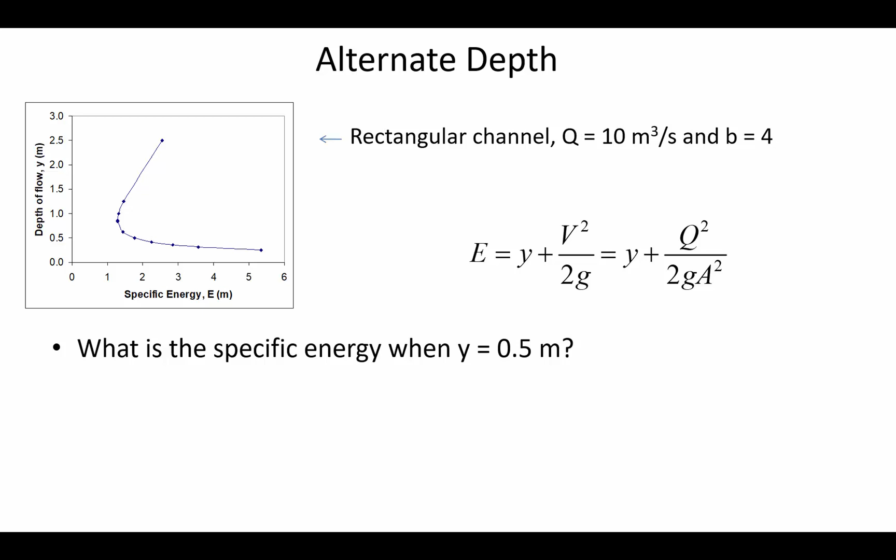But let's use the specific energy equation to find the alternate depth numerically, because graphically we can find the alternate depth too. So graphically, if you go sideways and intercept the figure, here's our specific energy, and then up the same amount of specific energy, and then back over again, it looks like it's maybe about 1.45 or so, approximately.

Let's find out exactly the alternate depth corresponding to 0.5. So 0.5 meters is one of the depths for that amount of specific energy. Which is the other? Now the way to do this is we're going to just neglect energy losses. We're going to assume there are two different depths, and that if there was a jump between them, there wouldn't be energy losses in the hydraulic jump. In future examples we will address how you could account for the turbulence that exists in a hydraulic jump and how much energy is being dissipated and so on. But let's just find out what is the alternate depth for a depth of 0.5.

So the way to do that is we have to find out what is the flow velocity if we have that depth of 0.5. Well, the depth is already known, so we know y. So find out what is the flow velocity, v, solve for E, and then there's a second depth. And we might as well just leave this Q as 10 cubic meters per second.

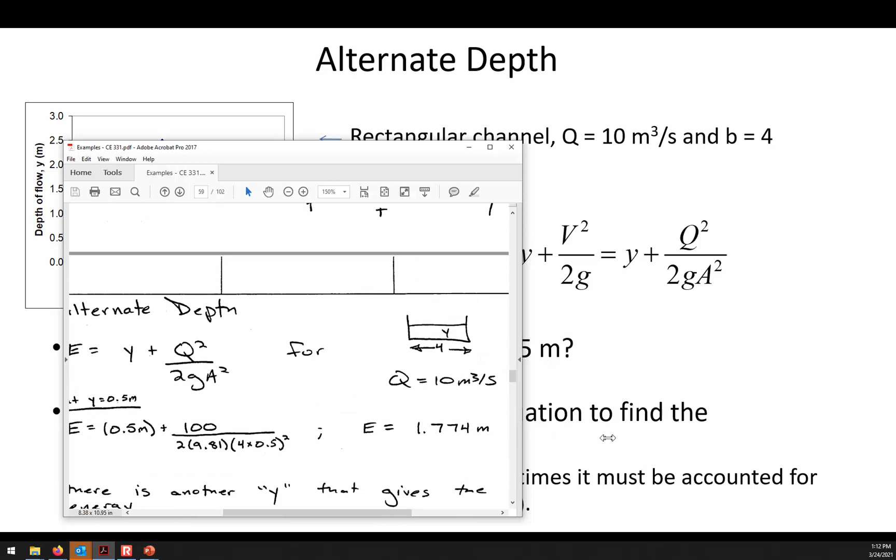Hopefully you got that the specific energy that's in the channel is 1.774 meters. Well, shoot, all right, I'll just do that. It resizes the window when I drag it over from my secondary screen.

Okay, at a depth of 0.5, then that means y is 0.5. The width of the channel is still 4, so the area is going to be b times y. The depth is also here in this first term, so the energy is 1.774.

So there's another depth out there that gives you the same amount of energy, and we can see it graphically here. So when you've got 1.77, here's the 0.5 that gives you the 1.77. So what is this other depth that gives you the same amount of specific energy?

Okay, so what we do is we say 1.774 is equal to y plus Q squared divided by 2gA squared. And Q squared is 100, because this is 10 cubic meters per second.

2g down in the denominator, and then a squared, so 4y, and then squaring that.

Now we already know that 0.5 will give you a solution, so we already know that root. That's not the root that we're interested in.

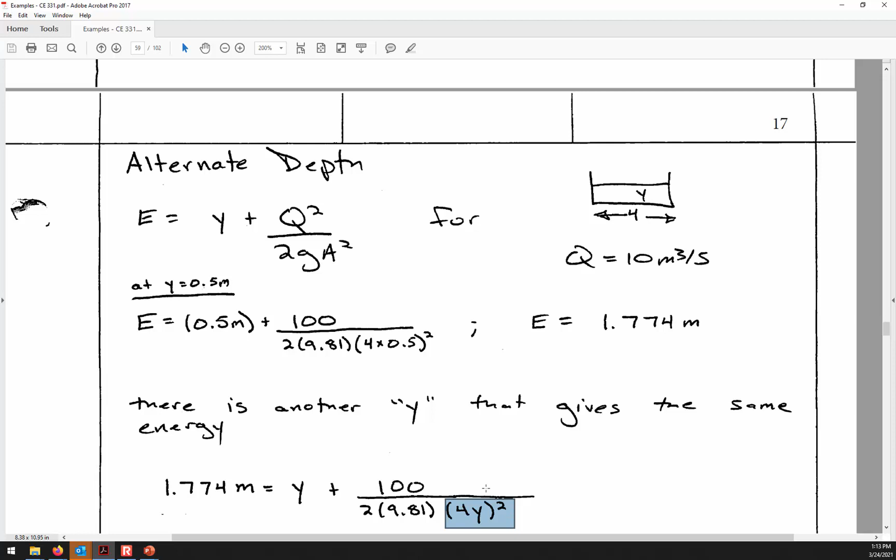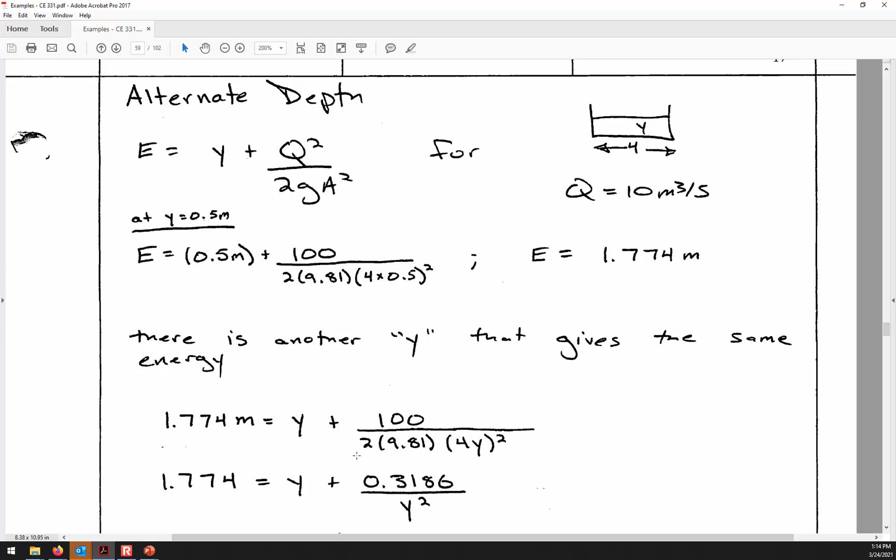What we end up with is if you multiply, just combining variables here in the denominator, 4 squared is 16 times 2g, and then 100 divided by that gives us 0.3186 in the numerator, and then multiply each term by y squared.

So you can see I'm just doing a little bit of algebra here. On the left side of the equation now, 1.774 y squared. This y has been multiplied by y squared, so now it's y cubed. And then the term furthest on the right, we multiplied that by y squared, so now it's out of the denominator.

So now this is a cubic equation, and I can rewrite that as y cubed, and then move the minus, subtract the y squared term to the other side, so minus 1.774 y squared plus 0.3186. So on your calculator, can you solve equations like this?

On your Casio, I know that I can here on the HP. We're looking for what are the three roots of this equation. We already know one of them is 0.5.

You can use solver. The thing about solver is that it's going to require an initial guess. And so if the initial guess you give it is like 0.4, then it would go out and find whichever solution is closest to that initial guess. So if you told it 0.4 is the initial guess, it's just going to go and find the root that you already know. So solver can work, but you're going to have to make sure that the initial guess you give it is larger.

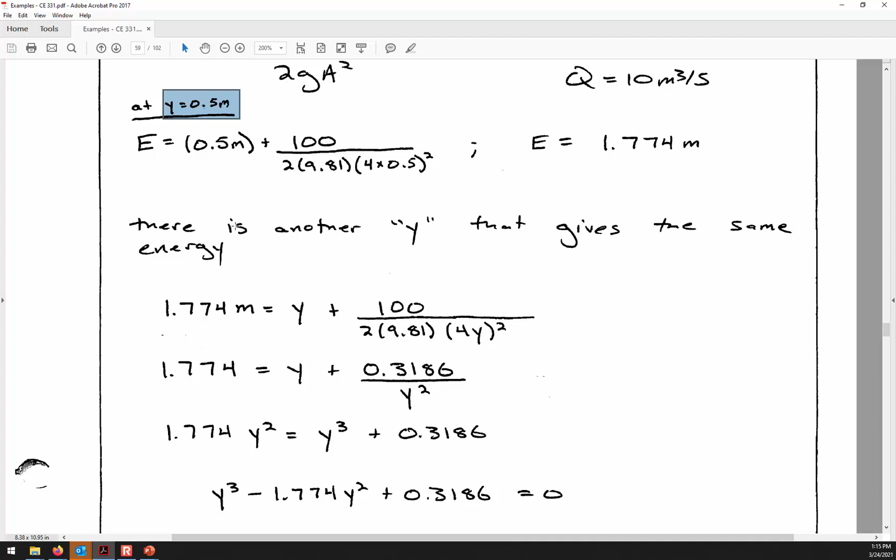Maybe you want to give the initial guess like 5. And so then as it's zooming back and forth looking for, with a numerical solution, what value of y gives you equality, then it would find the root that you don't know yet.

So the other way is just to solve for the roots themselves. And so we have one of the solutions at the depth we already know. One of the solutions is a negative value, which doesn't have any meaning when we're talking about a flow depth.

But the subcritical root is 1.658 meters. And so we had a supercritical depth and a subcritical depth.

And so when you have 1.774 meters of energy, then it can either be a supercritical depth causing that, in which case most of the energy is coming from the velocity head, or it could be a depth where you're having only a small fraction of the energy from velocity head and the majority of it from the depth itself. Okay, so does everybody understand this approach here of how to find the alternate depth?

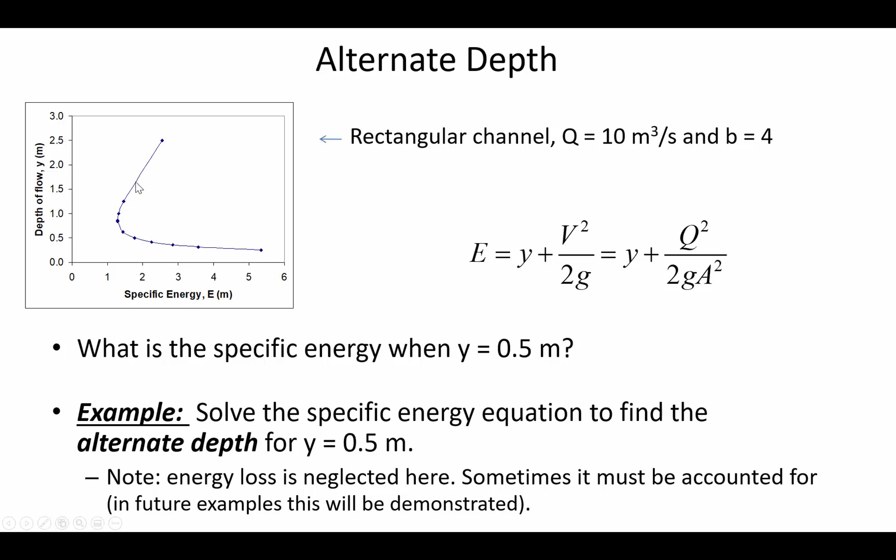What we're trying to do is find out from a numerical standpoint what is that other depth that has the same amount of specific energy. Let me put it back up on the screen here in case anybody wants to ask a question.

1.66 on Casio. Good.

Critical conditions is when you have the lowest specific energy for a certain channel and a certain flow rate. So this critical point is the location where you've got the lowest specific energy for a certain flow rate.

And what it means is that the amount of specific energy, let's see, one of those equations is the super equation, and one is the sub. Yes, the solution, this is the supercritical depth that solves the equation, and this is the subcritical depth.

So what we know is that the critical depth is somewhere in the middle between those two. Not necessarily in the middle, but it's between them. But yes, this is supercritical flow and this is subcritical flow, if the water is at those depths.

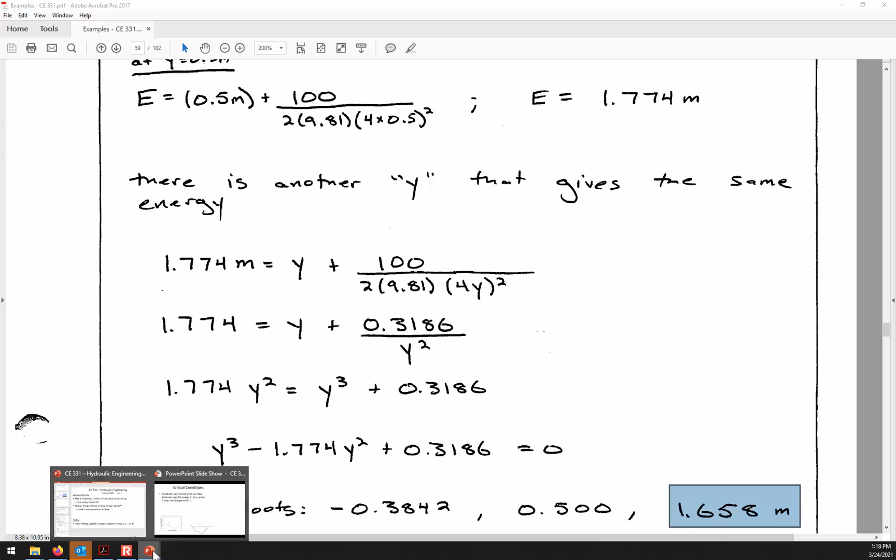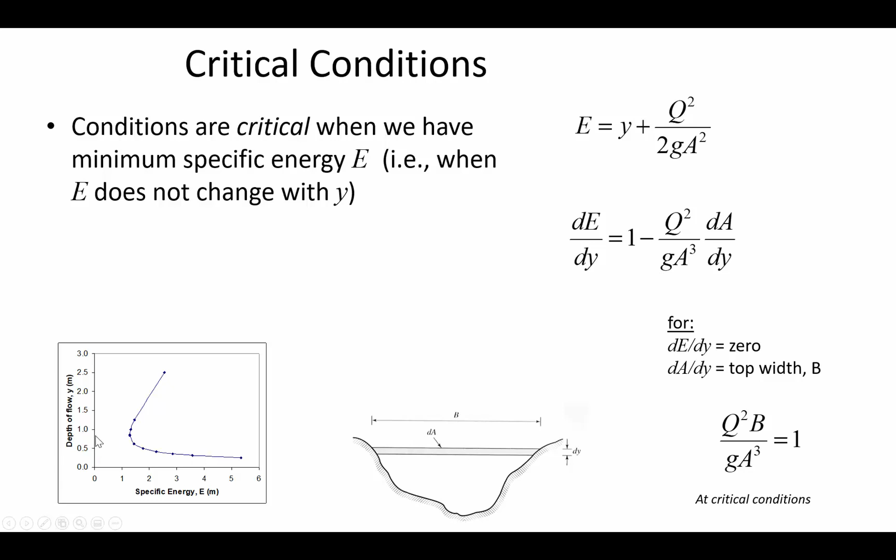Let's find out what depth would give you critical flow for a rectangular channel with the same conditions we've been looking at before: a width of 4 meters and a flow rate of 10 cubic meters per second. If we go back to the figure, we're trying to find the critical depth. Just by looking at it, it's maybe around 0.9 approximately, but let's solve for it using the formula.

So Q squared will be 100 in the numerator on the left side, G is 9.81, BC is 4, and the area when conditions are critical is 4, which is the width, multiplied by y sub c cubed, the critical depth cubed. Let me give you a moment to jot that down and try to solve for the depth when conditions are critical.

On the left-hand side we've got Q squared, so that's 100 divided by G, which is 9.81. On the right-hand side is 4, the top width, times y sub c cubed. In the denominator of the right side is the width of the channel, B sub c — here I'm saying T sub c, just the top width, a variable used in place of capital B in some texts — we substitute in 4 there as well. Rearranging symbolically for y sub c, we get that the depth should be 0.860 meters. That's the critical depth.

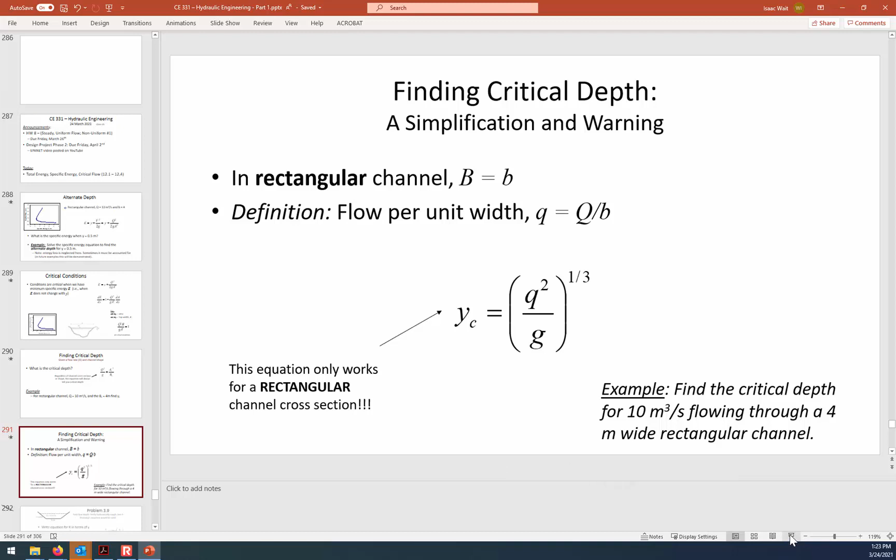That formula applies whether the shape of the channel is rectangular or trapezoidal — it's always valid. But you need to be careful, because this version of the equation will give you the critical depth only if the channel is rectangular.

It relies on a parameter known as flow per unit width, which you can calculate if you have a rectangular channel. When the channel is rectangular, the top width capital B is the same as the bottom width lowercase b. So flow per unit width is the flow rate capital Q, in cubic meters per second, divided by the channel width lowercase b. Think about the units — it's either cubic meters per second per meter of width, or equivalently meters squared per second when the units cancel.

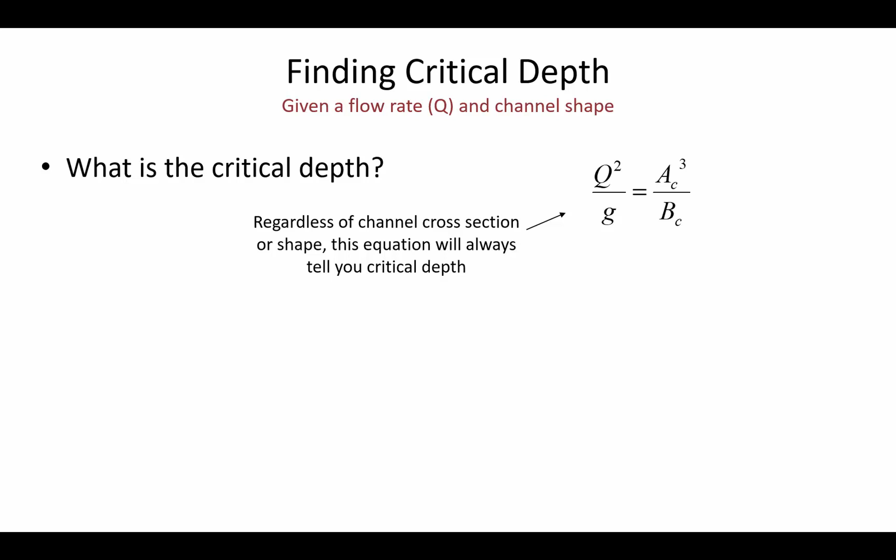For this same rectangular channel, we already found using the previous formula that the critical depth is 0.860. Let's double check this formula, which only works for a rectangular channel. First, calculate the flow per unit width, lowercase q. Our flow rate is 10, and the channel width is 4, so lowercase q should be 2.5 meters squared per second. Then in the formula you square that.

Okay, so I'm now 2.5 times 2.5 in the numerator, and now divide by g, so divided by 9.81. And then finally we take that to the 1/3 power. So it's important to pay note of the exponents here.

One of the common mistakes I see on exams and homework assignments is that people forget to square the flow per unit width inside, and then they forget to take it to the 1/3 power once the ratio has been calculated. So just to refresh, we had done flow per unit width, which is 2.5, squared it, and then divide by 9.81. Okay, so that's 0.637, and then that needs to be to the power of 1/3, so to the power of 0.33333.

Okay, and here again we have 0.860. So you can find the flow per unit width, square that, divide it by g, and all of it to the 1/3 power, and it gives you the same 0.860 critical depth.

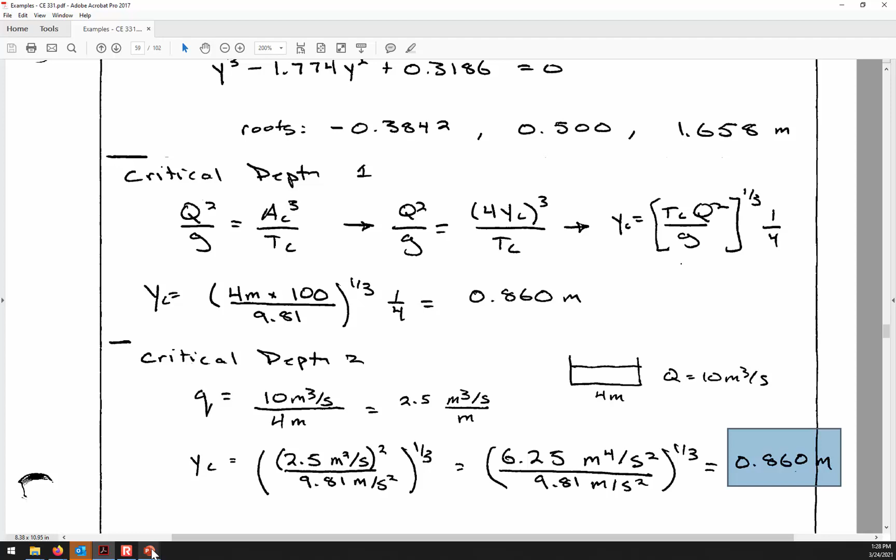So that's why we have to know about the critical depth, is that oftentimes there are going to be, whether it's a change in channel width or a step up in the bottom bed, these things that cause the water to flow at the critical depth. So it does have physical significance. It's not just some abstract notion of a depth that exists only on a chart. It does have physical meaning.

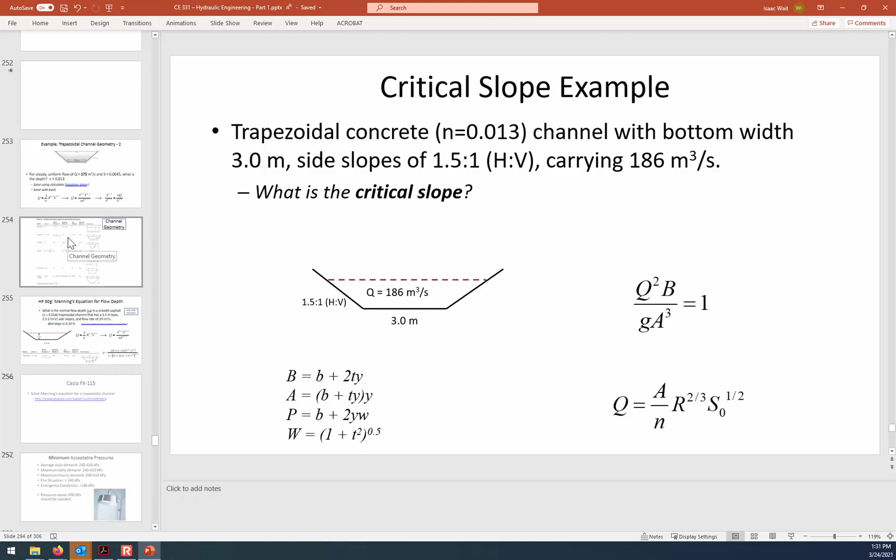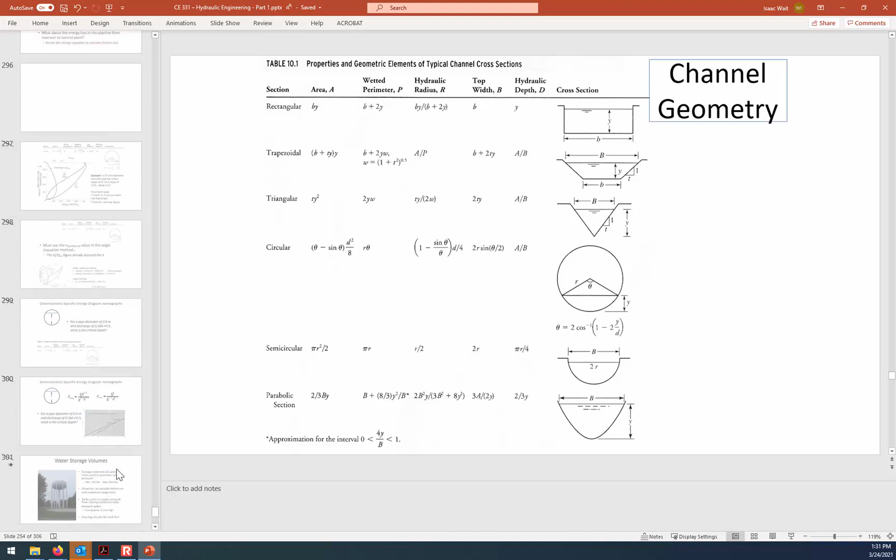Let me take you back to some formulas I've shown you before. Here they are. That's saying for every 1 unit of vertical, you've got T units of horizontal - vertical 1, T horizontal. So what that says for this one: in this diagram, it's saying 1.5 horizontal to 1 vertical, so that means T is 1.5.

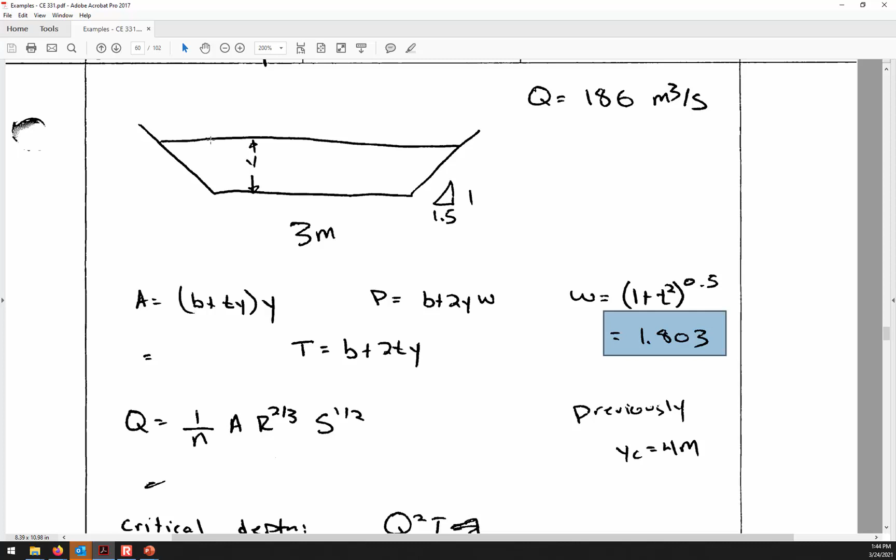First of all, find the critical depth. So substituting in the flow rate squared, and our expressions for this channel that has a bottom width of 3 meters and 1.5 horizontal to 1 vertical. That means the W term that's going to go in our geometric parameters is 1.803. Looks like maybe I didn't even end up using that - I'm going with just the rectangle, and then the side triangles put together as another rectangle. In any case, the critical depth is 4.12.

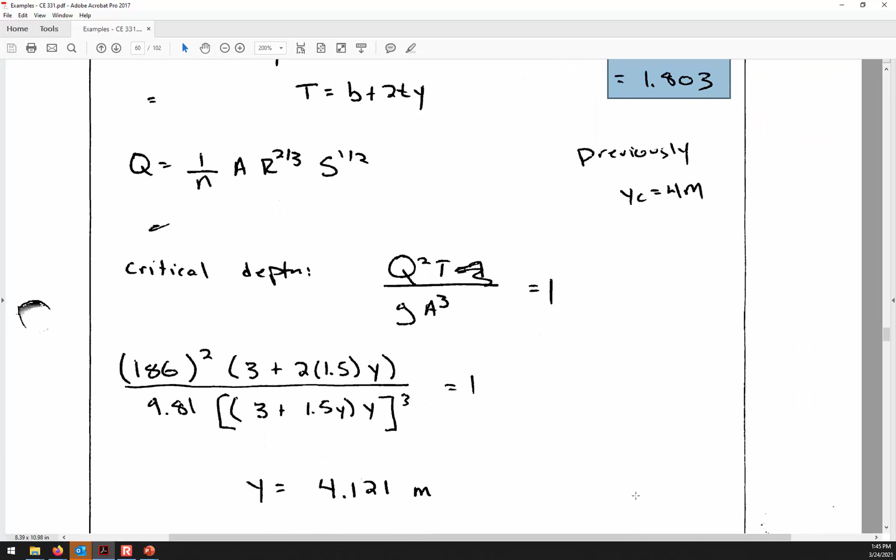Once you know the critical depth, you can substitute it into the formula for area and wetted perimeter, because hydraulic radius is area divided by wetted perimeter. Manning's equation is area divided by n, times hydraulic radius to the 2/3 power, times slope to the 1/2. Rearranging that equation, we solve for the critical slope. The wetted perimeter that goes along with that depth is 17.86 meters, and the cross-sectional area is 37.84 meters squared. Then I rearranged Manning's equation to solve for the slope: in the numerator is Manning's n 0.013, the flow rate 186, then the denominator area times the hydraulic radius to the 2/3 power, where hydraulic radius is area divided by wetted perimeter. The slope you'll solve for should be about 0.0015.

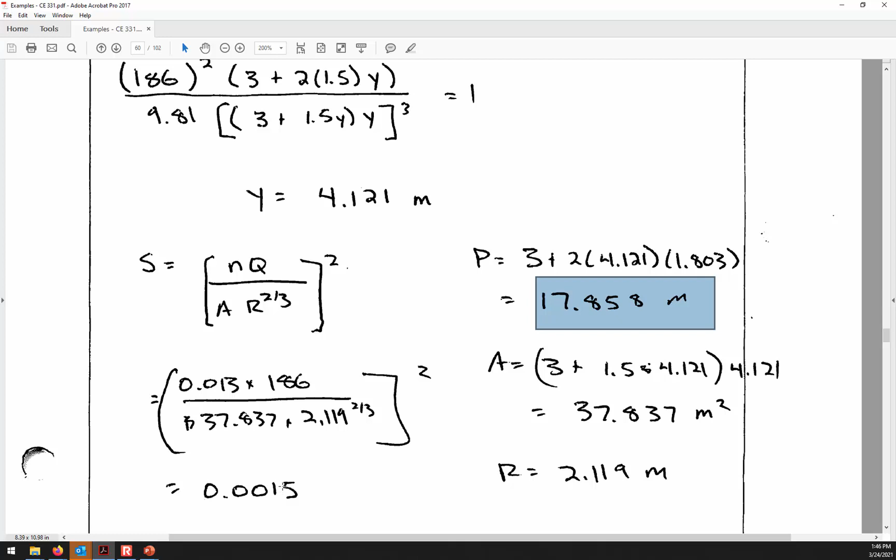So that's the critical slope. If you have a trapezoidal channel and you want the flow to be critical, then it should be laid out on that 0.15% slope.

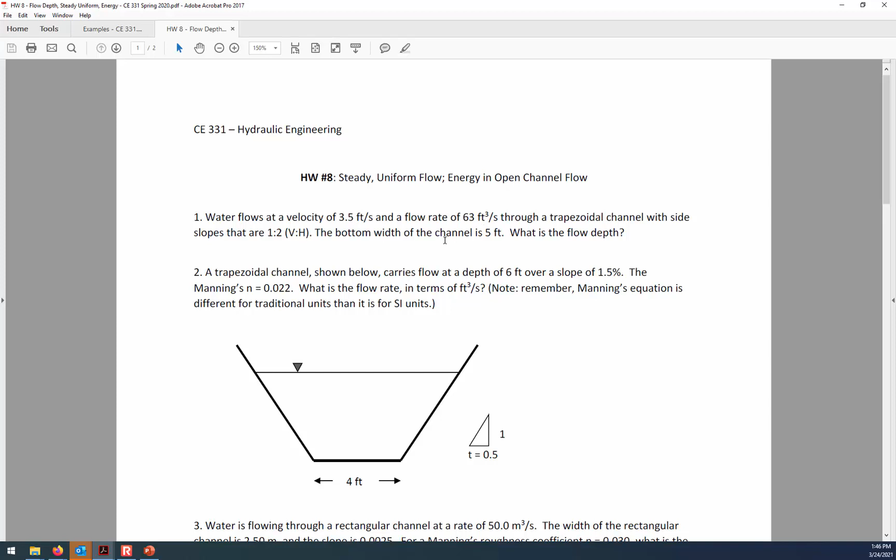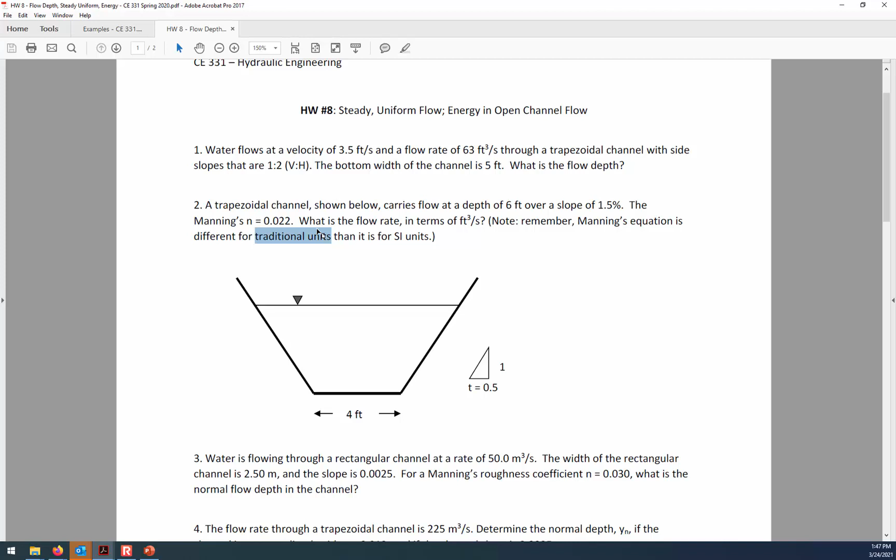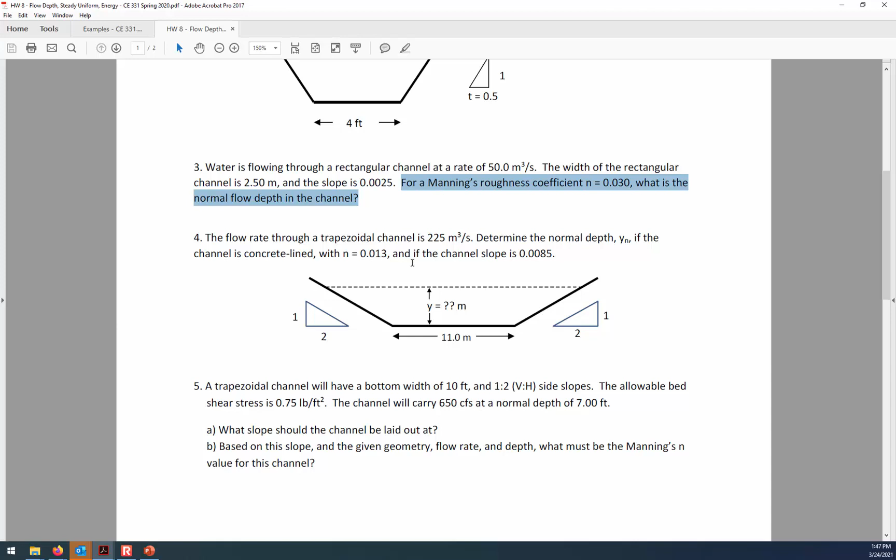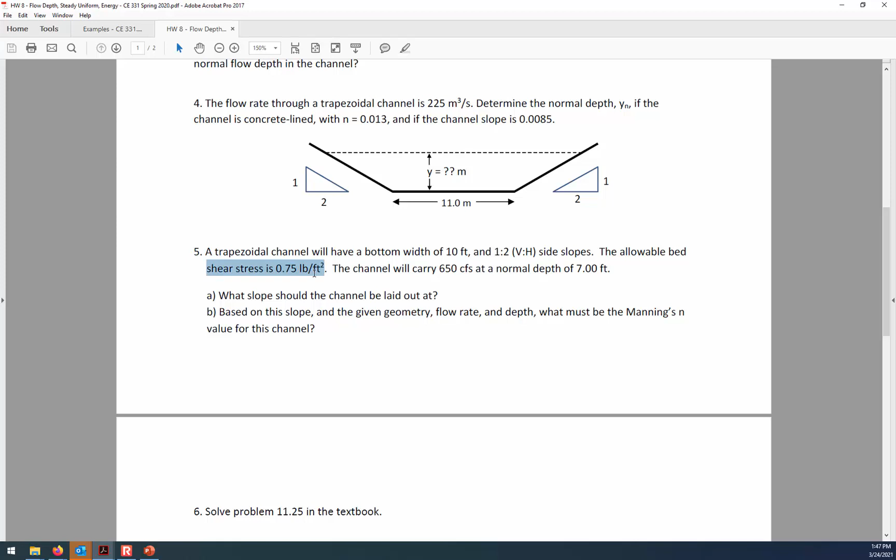Homework 8: find the flow depth. Looks like I'm giving you the flow rate Q, the geometry, the side slopes, and so on. Here's a Manning's equation problem, given in traditional units, with a hint - remember you have to use the 1.49 coefficient on the front when using Manning's equation. Here's another Manning's equation problem: determine the flow depth. We've got a trapezoidal channel with Manning's equation, this time traditional units, and what slope - solving for the slope when you want a certain amount of shear stress not to be exceeded. And then a couple of textbook problems, including some that begin with chapter 12, like specific energy type questions. This one's 10 problems.